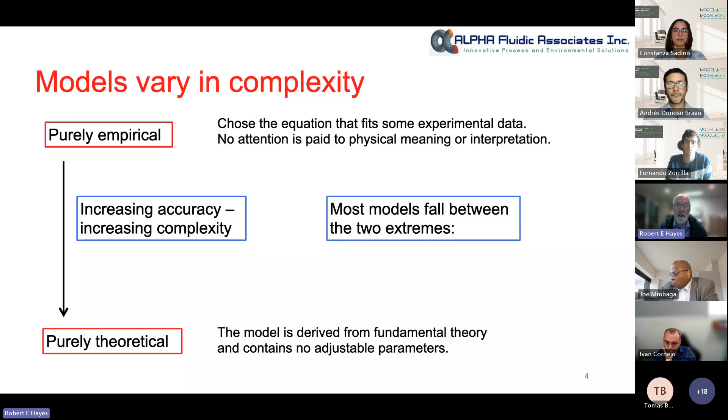Be very sure what the model is going to be used for, because that determines to a certain extent the model you choose. We can make incredibly complicated models for very simple processes, but there's not really any point. Don't make the model more complicated than necessary. Remember, the model doesn't have to be perfect to be useful.

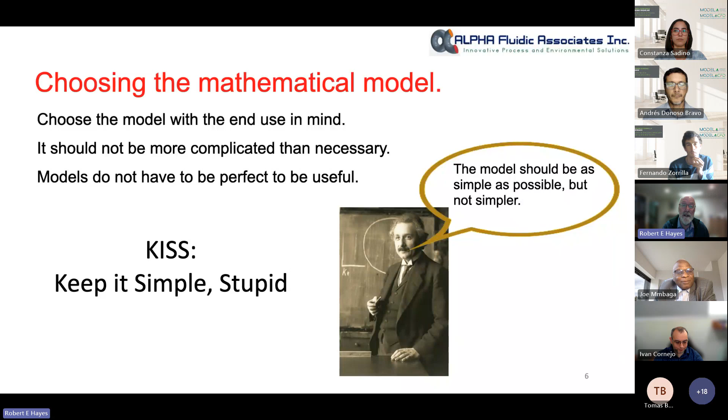The quote in the speech bubble is usually attributed to Einstein, although there's no evidence he actually said it. Make the model as simple as possible, but don't oversimplify, because that can lead to errors. I'm not sure if it's politically correct to use the KISS principle, basically keep it simple, don't make things more complicated than they need to be.

There's a whole world of mathematical modeling, and what we're really focusing on in today's webinar is what we call chemical process models. Essentially, in a chemical process model you're solving the basic momentum, energy, and mass balances. You do that in any process, but here we're really talking about transport phenomena, where all the equations take the form of complicated partial differential equations.

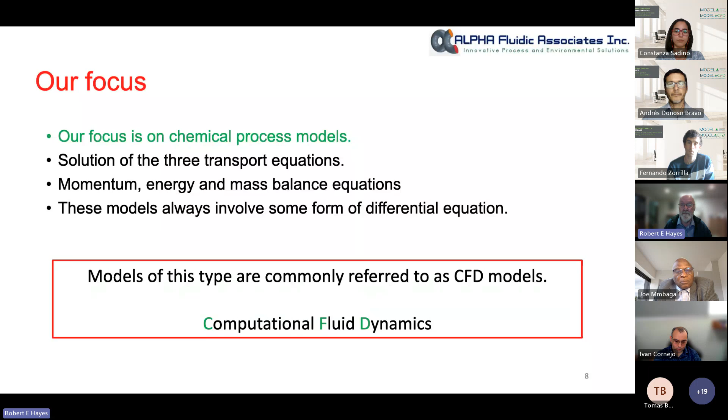When modeling that type of system, it's generally referred to as CFD, computational fluid dynamics. That's a bit of a misnomer, because nowadays modern CFD modeling includes temperature and transport, so it really should be called computational transport phenomena. But the first codes people dealt with were solving the Navier-Stokes equations, and that's why it's called computational fluid dynamics.

So that's kind of a crude introduction. Now, what do you do? What are the basic steps in building a CFD model? From a global point of view, it's very simple. First, you're going to have some kind of physical system - here we have a biofermentation reactor - and you're going to decide what equations you're going to use.

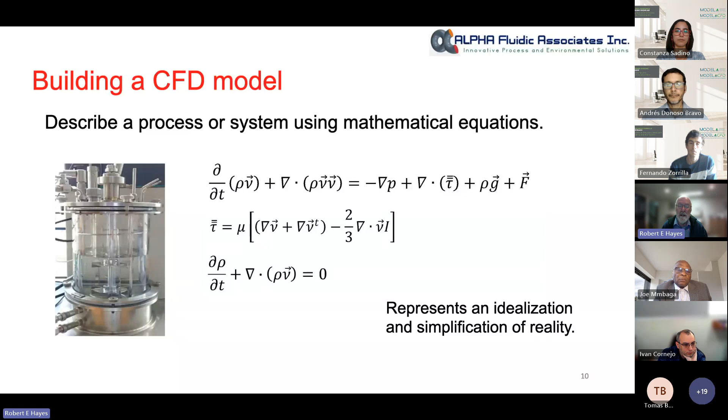You recognize that the equations you choose are always some simplification of reality. You're making assumptions - you're always going to be making simplifying assumptions, and you hope that they are the good ones. Now those equations have to be solved in the computer, so you have to translate everything into a form the computer can understand.

So now what's the next problem? We cannot solve the equations in the CFD model analytically, so we have to use approximate solutions - these solutions have to be numerical. Essentially, what you do is take your big domain and break it up into a bunch of little pieces. You need to do that because you're approximating your partial differential equations with algebraic equations, and they're not accurate over the whole domain.

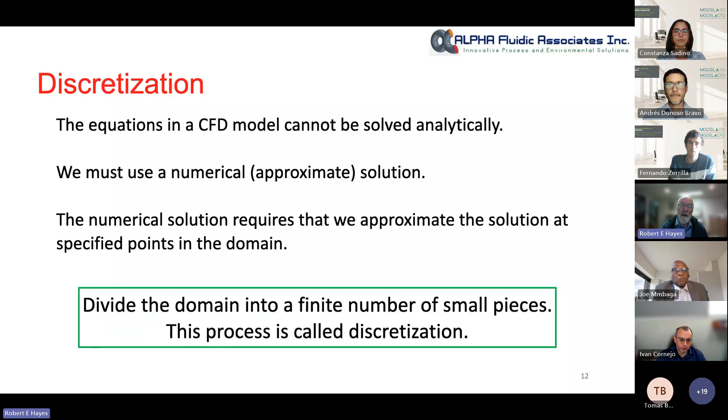Again, we have good software tools that allow us to do that. What's important to appreciate in the whole CFD modeling process is that building this mesh, this discretized domain, is key and perhaps possibly the most important step in obtaining a reliable solution. If you don't have a good mesh, you will not have a good solution.

When you are doing your solution, you have to test very rigorously that the mesh has been built correctly. So at the end of this step, what you're going to have is a whole bunch of equations written over your domain, and then we have to solve those equations.

I'm not going to talk at all about solution methods, but just be aware that there are many different ways of solving equations, and the choice of solver you choose is going to depend on the system you have. Commercial CFD codes have all kinds of options, and it's very important that you choose the correct one.

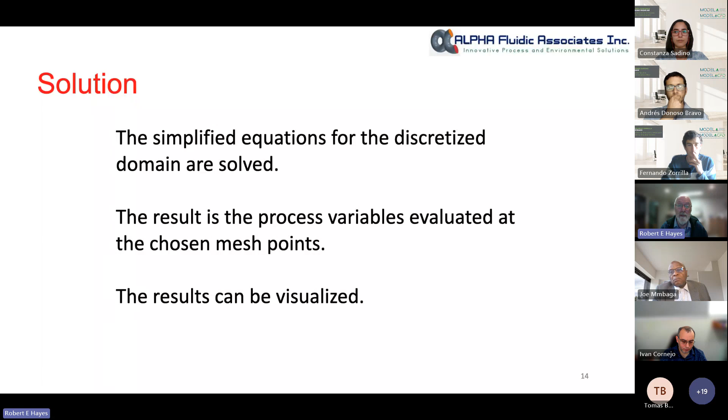If you're doing a complicated 3D modeling study, especially transient, you're going to get terabytes of data, so visualizing them can be quite complicated. I'm not going to talk about the exact techniques, but there's good software to do that.

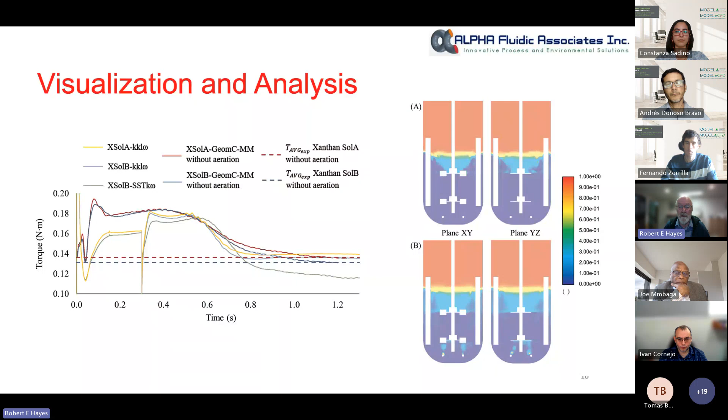But also you might have simple graphs to track certain variables at certain locations in the domain. The point is you can make lots of very flashy, pretty pictures, but coming back to it, you have to make sure that those results actually make sense.

That's going to give you some error. Then you're going to solve it and get your solution at your given points, and then there's going to be numerical error. What's important to appreciate is that all of these steps in the solution are going to give you some error. You can't get away from it.

Of course, the third one is where you just screw up when you're inputting the data, and that can be hard to find. And then finally, the numerical errors, which come from the solver. Again, there are tested methodologies for looking at those errors, but it's super important that you examine the errors in your system.

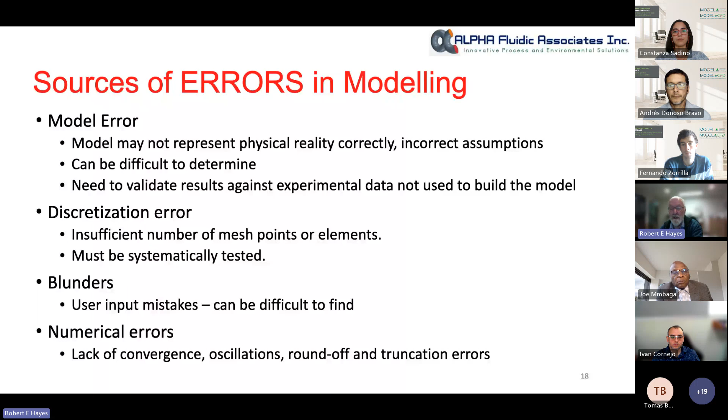And that really brings us to the final topic: validation. What do I mean by validation? Validation is the idea of proving that your model is giving you an acceptable level of accuracy. There are books written on how to validate models, but basically they have to reproduce your experimental data. And if they do that, at least that means the model is reproducing your experimental data.

That's a little bit of a cheeky statement, but that's really all it says. Because unfortunately, no model can ever be completely or perfectly validated and verified, because there's always going to be some experiment that you don't try, that maybe it doesn't fit on. So these are just things to keep in mind.

Now, at the end of the day, when I started, about 40 years ago, I wrote my own finite element codes. Well, nobody does that anymore because it's too complicated and it's also a waste of time. So you're going to use a commercial code.

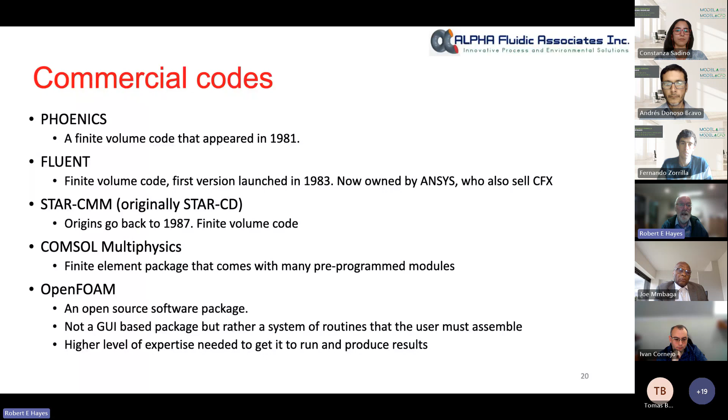The reality is that anybody today who's doing serious CFD modeling is going to use commercial codes or open source codes. You're not going to waste time writing your own.

When used with care by knowledgeable users, CFD codes can be an enormously powerful design tool, and that's very true. If you don't know what you're doing, you can get lots of very nice, pretty pictures, but at the end of the day, they don't mean anything. They might satisfy your management who don't know anything about CFD, but they won't be very useful.

I guess I would say commercial codes are user friendly. The companies make a lot of effort to make them friendly. You can install them on your system or have someone do it, run the tutorials to figure out how to do the input, and you get pretty results. But that doesn't necessarily mean the results are correct.

What I'm trying to get the message across on, I keep beating on it, is that you should be very, very skeptical of CFD results. I'm not saying they're always wrong, but CFD modeling does have to be done correctly.

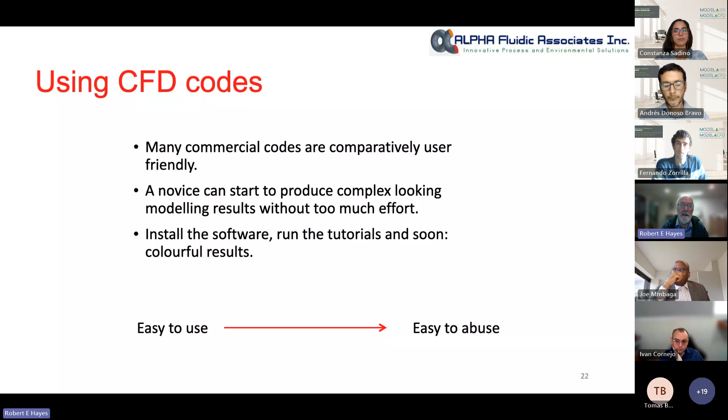And my last words of wisdom, and then I have a short example to show you. Once you've got a really beautiful, verified CFD model, the worst thing you can do is use those models to predict results that are outside of the experimental data range. In other words, don't extrapolate results. It's like predicting the future based on the present.

Go back to an issue of Popular Mechanics, if you know that magazine from the 1950s, and see what they were predicting we were going to be today. Half the population of Earth was going to be living on the moon. So it doesn't work. It's really, really dangerous to extrapolate.

In general, the more theoretically based the model is, the better it's going to work. But even then, extrapolating can be dangerous. So that's the end of the formal bit, and I'm just trying to give you a little bit of an insight into what CFD modeling is about.

And now I'm just going to show you a very short example. I'm not going to give you a lot of technical details. It's just that we're pretty proud of this project.

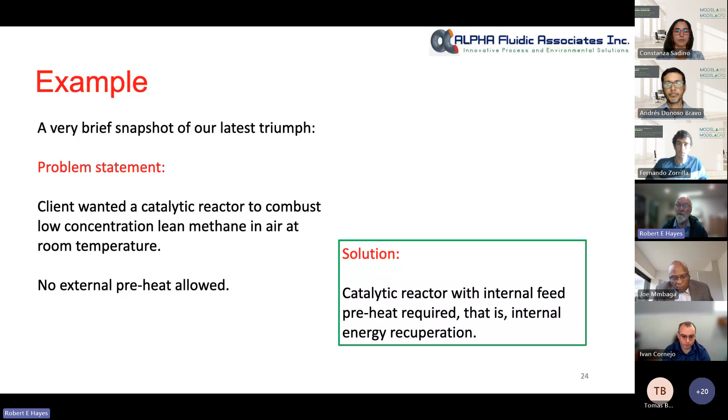This was a system where the client wanted a catalytic reactor to combust low concentration lean methane. So you have like 1% methane in air at room temperature. You're not allowed to preheat the feed, and the reactor has to burn the methane. So basically what we do, we have to design a catalytic reactor with an internal feed preheat, an internal energy recuperation.

That was the idea. So we do some CFD analysis to study the operating range, and without going into all the details, you can see this is a temperature projection, and we were able to demonstrate that provided we could ignite the system, we could maintain temperatures to get methane combustion with room temperature feed.

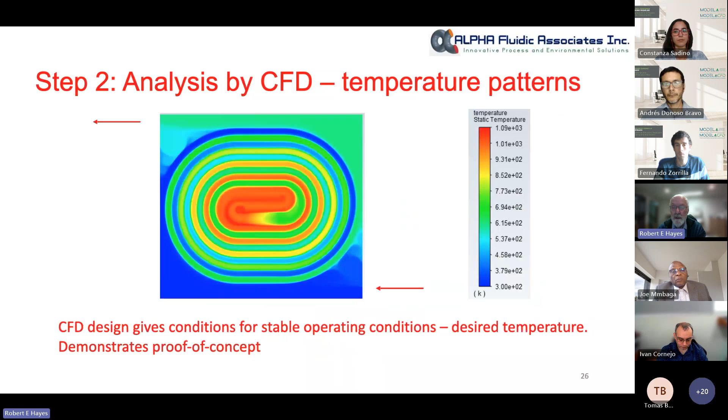So basically we built this, we did a whole bunch of tests, and at the end of the day, without showing you the results, I would say that the model predictions were exactly what we got experimentally, which was amazingly cool, we thought. Perfect CFD design.

So we went directly to scale up to full production size. Of course, we designed that in the computer. We do CFD analysis to make sure we'd get good flow distributions, temperatures, etc., because it was a much bigger unit. And at the end of the day, it worked.

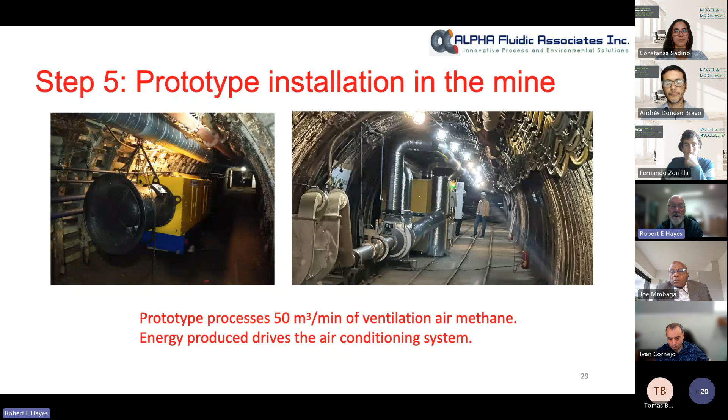So, summary, this was a completely CFD-driven design. We only had built one pilot reactor, and we did direct scale up with just CFD. So this was a huge savings in time and cost. And now what we've been asked to do is optimize and scale up the design by a factor of 10.

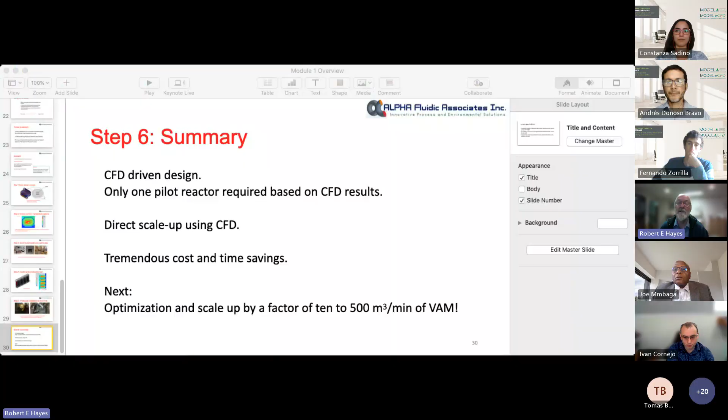Thank you, Robert. Very insightful presentation. A quick overview about what CFD is all about, and then a very interesting real case application.

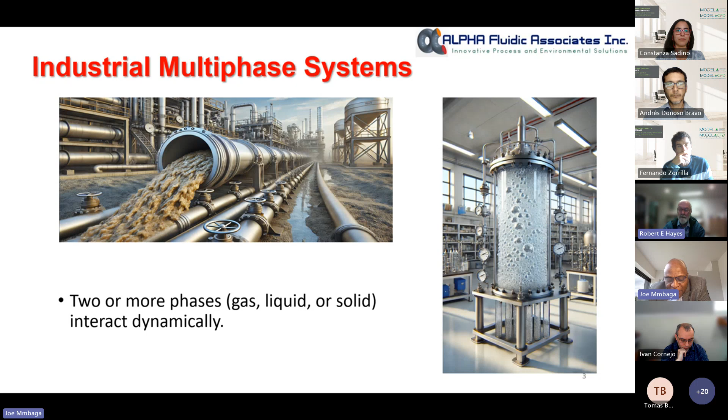So first, the what. A multi-phase system is a system where we have 2 or more phases, being liquid, gas, or solid, and they're all interacting dynamically. This leads to what we could say is either gas-liquid, in case we are talking about bubble columns, or liquid-solid if you are talking about slurry transport, or even gas-solid when you are talking about fluidized reactors.

Now, be all what it may, this is an extension above what you heard from the first presentation, that we are now going to add some more things or more issues which are going to come. In particular, we look at the interfacial momentum transfer, or also we have to look at the distribution of the phases and their holdup, as well as the turbulence, because in the presence of additional things in the system, the turbulence can be affected by the particles. And last but not least, we also have to take account of the interaction between and amongst the particles.

Now, having said that, then we need to have some approach. We can either consider all the phases just to be a continuum, or all the equations which are available are going to be solved for each phase on its own. And therefore they need to be coupled.

And if you use the Eulerian method, then the coupling is mostly just using models. This approach will be more suitable when you've got dense mixtures, but it won't be very accurate for following the particles. But again, since it is just for a simple system, the cost for computation here is not that much.

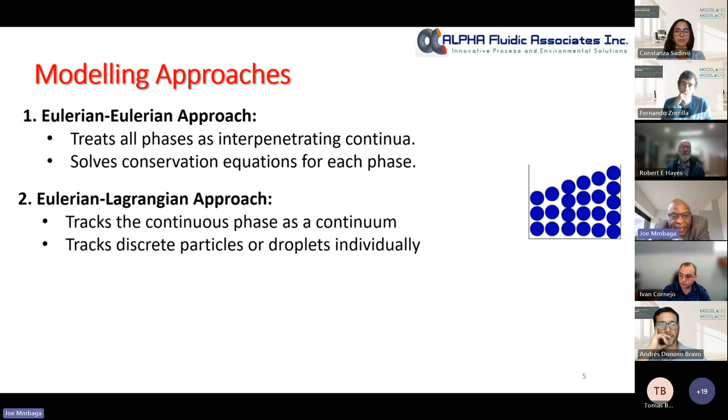Now, the other approach would be to treat each phase separately and then track the particles individually. So this is going to be much more computationally heavy, but then the accuracy is much higher than the first method, the Eulerian method. And also in this case, since we are going to be doing all these calculations for all the particles, we are limited to dilute systems, that being less than 10% in concentration.

Now, coupled to these methods, we also require to track the interface when we have immiscible fluids. In this case, we have methods like the volume of fluid or the level set method. And if we want to follow the distribution of particles, or maybe the growth or coalescence of particles, we have this submodel, which is the population balance model. So the matter of fact is there are only 2 methods, and these 2 can be said to be kind of subsets of the first 2 methods.

They're like the volume of fluid method and the level set would be Eulerian, a subset of that. Whereas if you're talking about DEM or maybe DPM, you'll be following this method here.

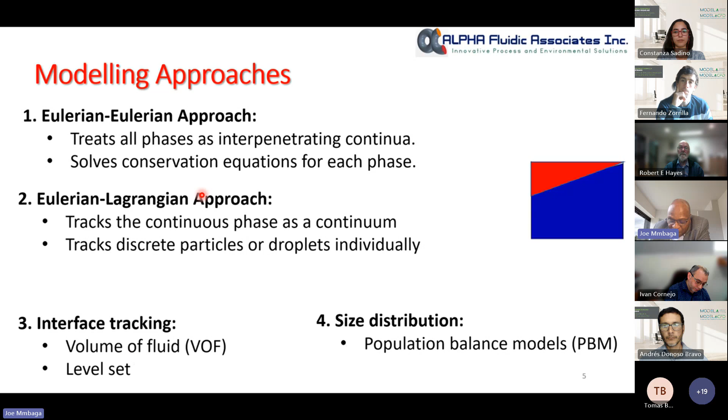What then to do? Why does this matter? It matters because in order to properly understand, design and optimize industrial processes, sometimes we want to find the efficiency. Maybe we are dealing with cyclones, which I'm going to show an example for. Or it may just be a matter of safety—maybe in a pipeline, particles are going to cause erosion, so you need to know the locations where this phenomenon can happen. And last but not least, it has to do with quality. Maybe in a granulation process or a deposition process. In that case, CFD can help us understand this much better.

Now what will be the tools? You already heard about the tools from the first presentation, but here I want to emphasize one additional tool, because those previous tools, ANSYS and COMSOL, are all general purpose. There's this additional tool here, MFIX, which is multi-phase flow with interphase exchange. This is purely dedicated to multi-phase. If anyone is new to multi-phase, this will be the package we recommend, because first of all it is free, but also it is supported by US National Lab, so I'll say it's very accurate. If you're new to multi-phase, this is the starting point.

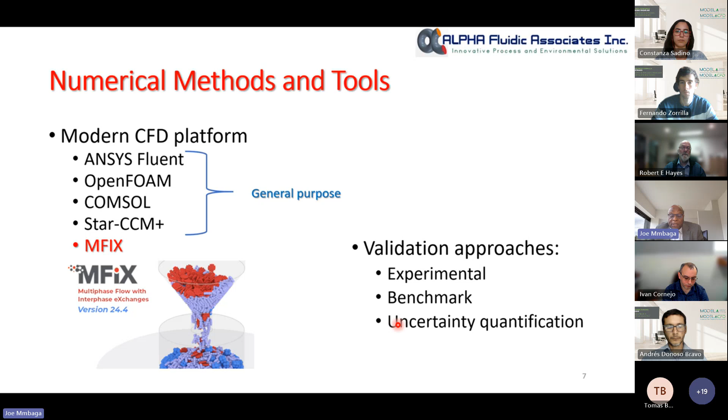Now again, the validation which was spoken about in the first presentation applies here. So for all the work we do, we have to validate, and that's what I'm going to try to show in my examples.

So I have 4 case studies. I will go through them briefly since most of these are client information, so I won't talk too much about some of the sizes and dimensions. However, the last example here I'll be more open about, and I'll show more of what was done exactly. In the first example, a client—an international client—wanted to venture into Alberta oil sands, and they needed to understand the challenges they would face when you have a very large area where you can get your bitumen, but you want to process it at one place.

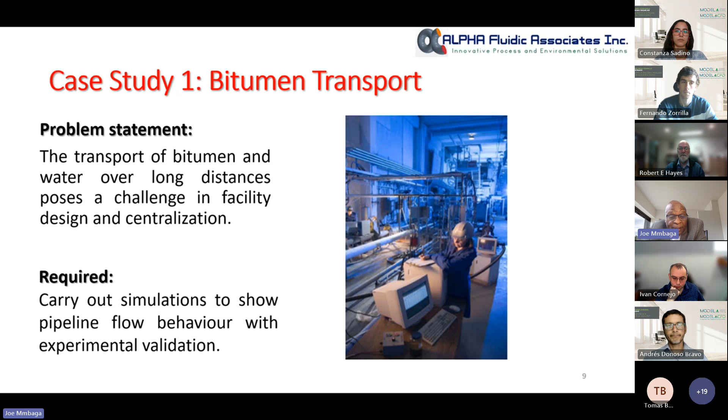So the task was to figure out and understand the flow behavior of this bitumen as you transport it along a long distance. This required 2 parts: first, an experimental part to see how the flow works. This was subcontracted to another lab, and we were contracted to do the CFD part based on the lab results.

Now the next part was to look at one of the phenomena whereby the mixture here is bitumen, which is a heavy oil, and it's difficult to transport this unless one can modify at least the wall interactions. So we want to see if we can reproduce what we call core annular flow.

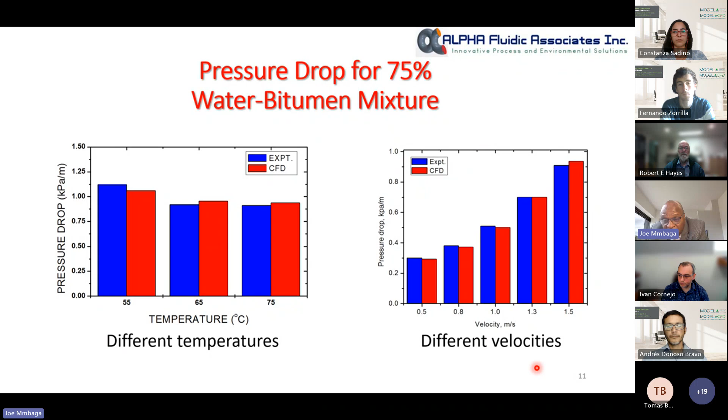For this part, again this is still a validation whereby we are looking at varying temperature based on experiments and CFD, which we could match very well, as well as varying velocity—again the CFD was matching very well with what was shown experimentally.

But with establishing the right flow conditions, the bitumen will migrate to the center of this pipe, leaving a very thin layer at the sides of the pipe. Therefore, the pressure drop is very much close to what one will see in a fluid like water flowing around. So this was a success, and the client was able to proceed.

I don't know if this project was actually built, but at least there was a flow assurance that yes, you can use CFD to elucidate what will happen when a complicated mixture of bitumen and water under different conditions can work under these parts.

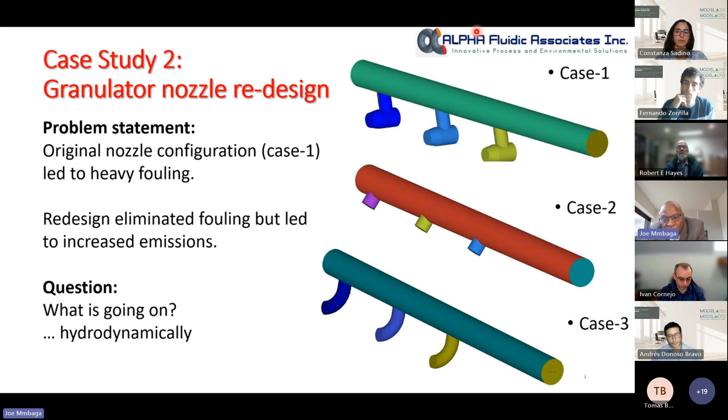So what we did was carry out multi-phase simulations for all three geometries. Now what you are seeing here is the model we made of the client's geometry, and then we carried out simulations for each of them.

Now what if we did the same flow but with the second case? In this case, the second case was a straight nozzle, and yes, they were able to eliminate the fouling problem. But as I said, still now they experienced higher emissions.

Now with the third case, again they increased the length of the nozzle and also it was kind of bent. Yes, there were no dead zones, and that's why the fouling was eliminated, but still the emissions were not eliminated.

In other words, the original problem, which was more of a reliability problem because they had to change the system more than they had planned, has now turned into an environmental problem. It was now more of a regulation issue because they were not meeting the standards.

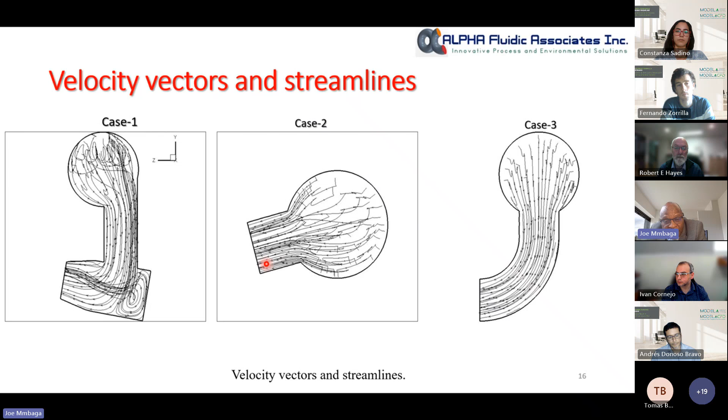In evaluating this situation, what we found is that there must be something at the local scale. Therefore, we had to compare the turbulence intensity as well as the energy dissipation rate. What we see is that for the original case, which I'm calling case 1, the turbulence intensity is much higher than the rest of the two cases.

Whereas in the case when they shortened this nozzle, it's almost 5 times less. And when they increased the length a bit and also made it a bit of a bend, it was increased maybe, but it's still 3 times less.

So with this understanding, remember this client was a sophisticated client. They knew they had a problem and they had a solution. It's just that they didn't understand what was the cause of the problem.

From the CFD calculations, it was clear that they had to increase the length, or at least make sure that this zone, the nozzle, wasn't just there to spray the slurry, but that some kind of conditioning was happening at the very low scales. With this knowledge, the client was able to solve the problem and continue with their production.

Now, with the next case, this was a different client. In this case, there's a gasification unit, and the issue again was fouling and erosion. Mostly this was in the first unit, a gasifier, which was gasifying asphaltene. Next to the gasifier we have a cooler, because we get a syngas.

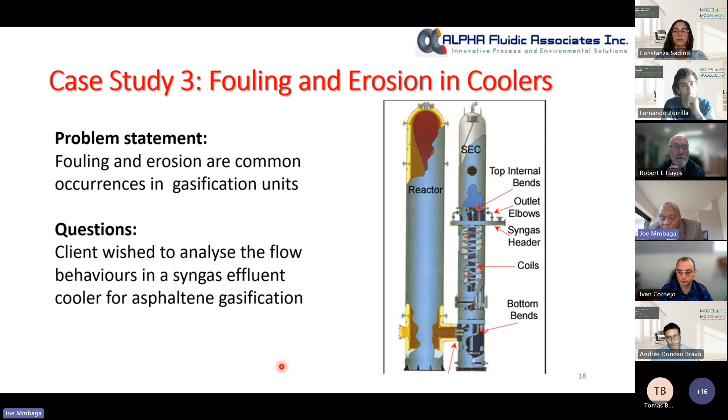From measurements, if you pick one bend, this is what was found - you could even have holes in some of the bends. So carrying out a CFD simulation around this geometry, we're able to show that yes, in these corners, in the bends, that's where you have the highest erosion rate.

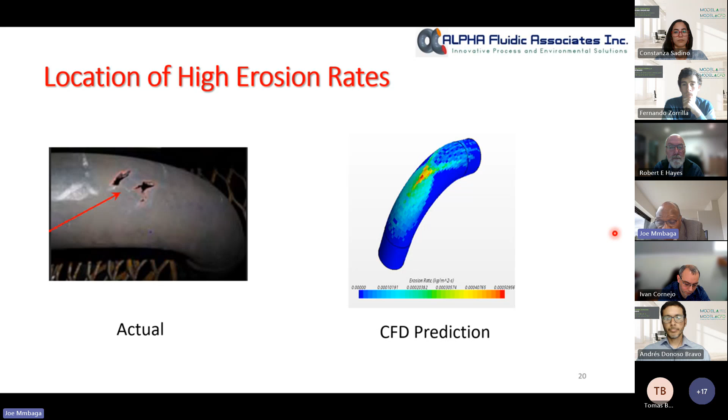So what the client had to do now is revert back to using large radius bends in all their pipes, and the problem was eliminated.

Now my last case, which I hope I have time to talk about, is the hydrocyclone separator. It's not a very big device, but it's very popular in pulp and paper operations, and also in oil sands. The task here was really just to get a basic understanding of how this device works and how to improve the design.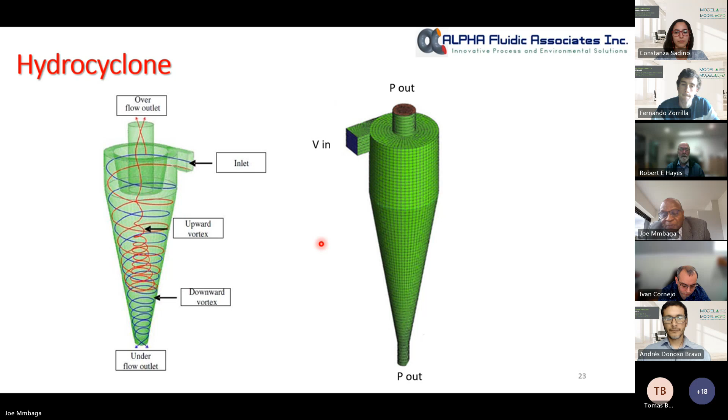I'm just going to describe how this works. The biggest part here was really to come up with the geometry, and how to establish the core - because the key to hydrocyclone separation is to be able to have a very good air core at the center. We can see that it was able to be captured. The elements here were hexahedral, about 500,000, and the whole phenomenon was captured. We're also able to verify the flow split as well as the size of the core.

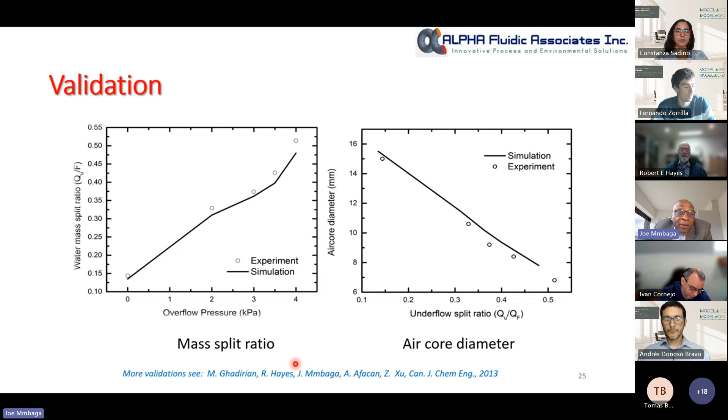Now, with this knowledge, it was possible to continue and do the design. For more information, this is published - it can be found in this paper.

What are the challenges? There are, of course, challenges - computational costs can be high due to the complex calculations. Likewise, the accuracy of the models depends on how one can select them, and of course they all require validation. Future trends - the way you see it, machine learning is going to be integrated into this, as well as having more high-performance computers and advanced models.

To conclude, multi-phase flow modeling provides critical insight into complex phenomena, and their applications are quite wide, as shown. The call for you is to explore these tools if you want to succeed in this field. And Alpha and Modela would like to be your partner in CFD. Thank you.

Thank you for the nice presentation. It's nice to see new tools like the one you just showed that people working on CFD can also tap into, apart from the traditional software. And the case of corrosion is very impressive, that you guys were able to predict the exact position where the corrosion was going to take place. Very impressive. Thank you.

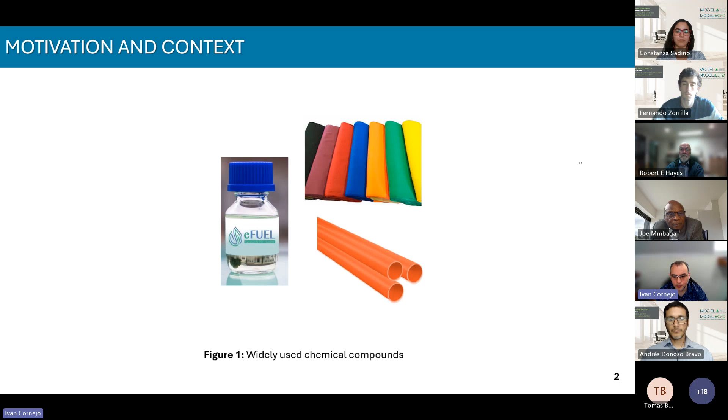It is currently accepted in the community that we have to reduce our dependence on fossil fuels. We're not talking only about fuel for cars, but also for many materials we use every day, like fibers and plastics. All of them currently come from fossil fuels, but it is also possible to make fuel, textiles, and plastic pipes from green hydrogen and captured CO2 from the atmosphere. In that way, we can produce identical chemical species but with reduced carbon footprint.

Of course, there are many challenges related to this. Today, fossil fuels are cheap and inexpensive - we basically dig in the ground and the oil comes up. But when we use hydrogen and CO2, we have to combine the molecules and build bigger molecules using temperature, pressure, and catalyst.

One important species in all of this is methanol. Methanol can be synthesized from hydrogen and CO2 and can be used to produce many alternative fuels, for example DME, but also some identical to natural ones such as gasoline, synthetic LPG, and so on, and also materials like polyethylene and polypropylene.

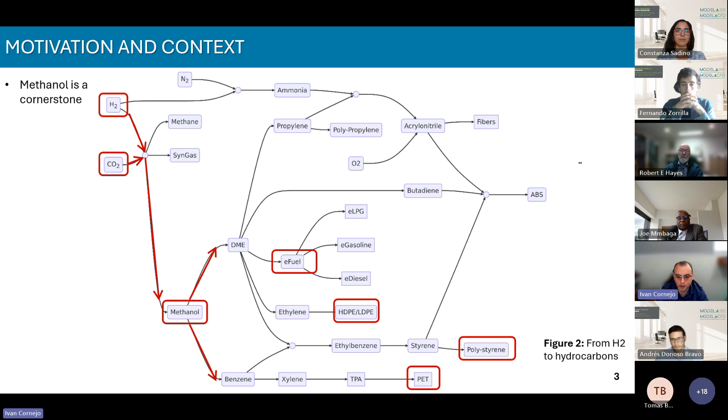How is methanol made in chemical reactors? Basically we mix CO2 and hydrogen in a reactor - I'm not going to go into the details because it's too boring. But with temperature and pressure, mixing these molecules in the presence of a catalyst, we can form new molecules, in this case methanol. Despite the temperature and pressure we use, we still don't have high yields or performance, so we have to separate the reactants that did not react inside the reactor, compress them again, and pass them through the reactor again.

That forces the reactor to be bigger and also requires a lot of separation. In this process, the equipment is expensive, but the separation process is also quite expensive, as is recompression. So if I can have better performance in the reactor, and have to recirculate and recompress less, or the pressure drop inside the reactor is lower, then I have savings and can reduce the cost of producing these derivatives such as methanol.

Everything here is happening inside the reactor. Those reactors in industry are quite big. Here I have some examples from a liquid-to-gas, gas-to-liquid plant in Qatar. Here we see the picture - the plant has 12 of those reactors. Every reactor has many tens of thousands of tubes, more than 10 meters long each. So quite big.

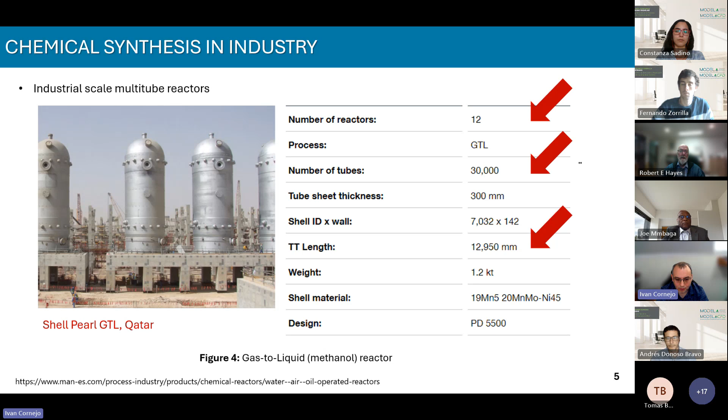Inside those reactors, typically we have many tubes. Inside every tube, we have the catalyst where the chemical reactions occur. In the example here, we have monolith - the most common catalyst support currently is pellet, but here we have monolith. In every tube, we have many monoliths. Inside every monolith, we have many channels, and on the inner walls of the channels, we have the catalyst. So modeling what is happening inside every pore of every channel of every monolith of every tube is quite challenging.

Every time we want to try a new operating condition or new reactor design, it is not possible to physically build the entire equipment, or at least it's not cost efficient. So, as the other speakers said, computational models are quite useful for fast prototyping and trying different conditions, saving time and materials. Inside the tubes we can have monoliths, but also pellets, which is the most common option, and some foams, for example. There are many scales involved, because the reactors are quite big, many meters long, but the chemical reactions occur at a very small scale.

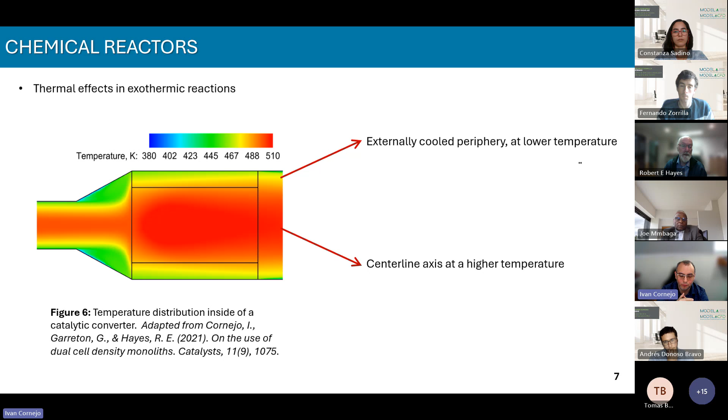So we thought, what happens if we change the substrate to distribute the flow differently, to have more heat released in the periphery and less in the axis of the reactor, so we can have a more flat temperature profile. We proposed a substrate with different configurations in the center and in the periphery.

When we tried to estimate the performance of such a reactor, we found there were no models able to predict how the flow distributes in such substrates. So we were looking for a model able to predict how much flow passes through the center region versus the periphery region, without doing experiments.

So we used CFD models. First, we made a computational model, as we see here in the figure, with two different channel sizes in the center and periphery of the monolith, changing the ratio between channel sizes, which affects how much flow goes through each part. The size of the core was also a variable of interest, to find out how much flow we want through the periphery.

We did a parametric study trying different core sizes, the percentage of the substrate with bigger channels in this example, and also fixing the core size while changing the ratio between channel sizes in each region. We found the effect of these variables on the core velocity in this case.

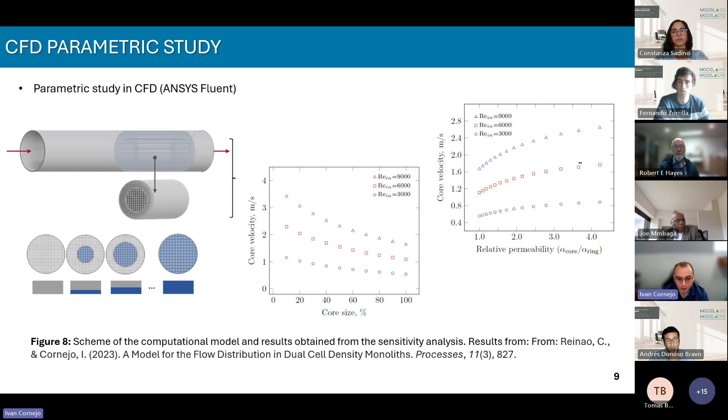Then, doing some mathematical modeling and mass balance, I'm not going to go into the details, but we found a model able to predict how the flow distributes depending on the analyzed variables. After non-dimensionalization, we found that the theoretical model agrees quite well with the CFD predictions. The theoretical model was new, so it needed to be experimentally validated, similar to the CFD model.

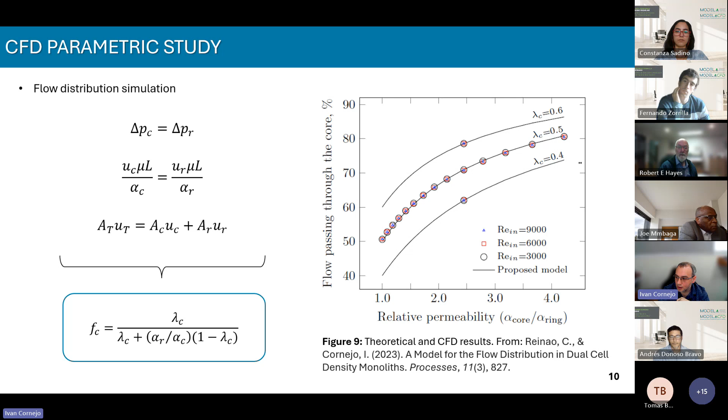After a vast parametric study, we selected the more promising configurations, ones where the flow is more different between cases, and built an experimental rig.

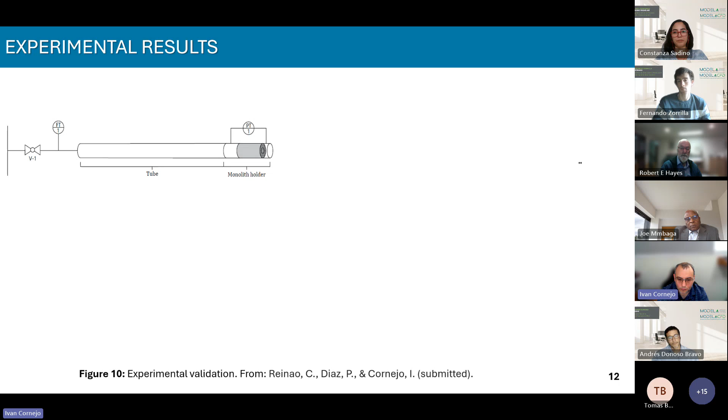Then we did some experimental runs. According to the results, the CFD model agrees quite well with the experiments. Of course we did everything that Bob and Joe mentioned about grid study and all kinds of validations, but this was the strong test comparing CFD results with experiments and with our theoretical proposed model.

In this case, everything came out quite good, finding that at the end of the day we could have validated the theoretical model using only CFD, because the CFD model resulted quite reliable. But of course we wanted more proof that the model was correct, so we did the experiment.

This is interesting because in some cases computational power is now cheaper, and models are becoming more sophisticated. So if we follow a rigorous procedure and take care at every step when building a computational model, we can get quite reliable data from the computational models themselves.

So this is an example of how we had a kind of crazy idea, then built a simulation, built a computational model, did the simulation, selected some very specific cases to build physical prototypes, and the next step is trying this in hot flow with chemical reactions, which is of course much more expensive, but we will try only one substrate configuration.

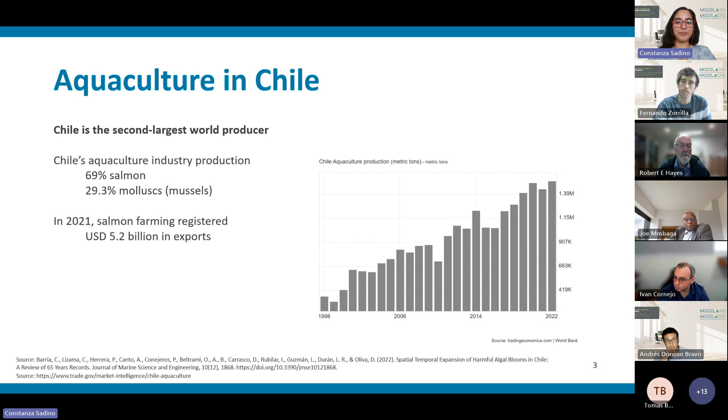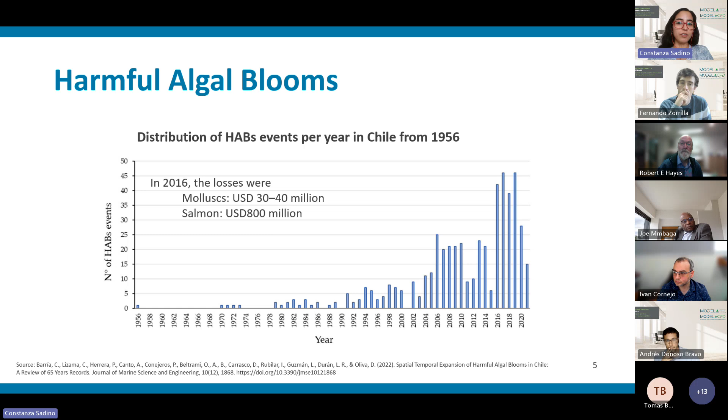To minimize and mitigate the effects of algal blooms, fish farms use different systems based on air diffusers. Upwelling systems are located underneath the fish cages: air bubbles bring water free of algae from deep layers of the water body to the upper levels to dilute the algae and increase oxygen availability. The second systems are bubble curtains surrounding the fish cages to create a physical barrier to keep algae away. The design and operation of these systems is key, but testing the system offshore is expensive and difficult, and testing them in swimming pools could be less effective in replicating the water body conditions.

This is where CFD modeling can be of great help. I'm going to show you the virtual prototypes we implemented for the company Camanchaca, which has fish farms in the south of Chile.

To accurately predict the performance of air diffusers, we need to use a multi-phase CFD model. We need to include key elements such as the perforation size and distribution, because that affects bubble formation; fluid properties such as density, viscosity, temperature, and salinity, because that affects bubble transport and oxygen mass transfer; and also the marine current profile, because we find different magnitudes and directions of the marine current as a function of water depth, which changes the bubbles' movement as well. So we need all those variables in the model.

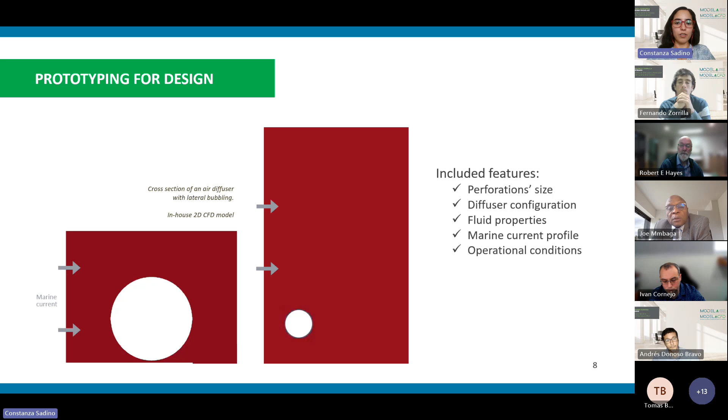perforation size and distributions. So with the simulation, we were able to identify which system lifts more water per cubic meter of injected air. This information is very important for the company, because based on that, they can select the best upwelling system for the specific farming site.

Based on a technical aspect, they need as much fresh water as possible, but also from an economical point of view, because air injection is energy consuming, so that costs money. So with this information, they can evaluate the trade-off between these variables.

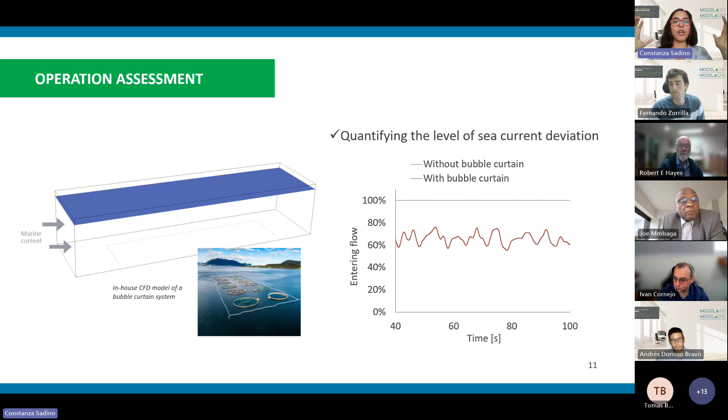In another project, the company wanted to know how effective a bubble curtain would be. So we implemented a model where we could measure the flow entering the farming site in order to know how much water with algae could be diverted from it. We were able to measure that of the 100% of water that could enter the site without the bubble curtain, only 60 to 70% could enter the site using the system. That allows us to have an idea of the efficiency of the protection of the system.

We can also use these models to understand the algal bloom movement and how much dilution we can achieve with these upwelling systems. We can model the algae bloom as a tracer dragged by the sea current, and we can consider the depth of that algal bloom, as well as the depth of the system. We can measure how much algae is penetrating the system with the bubble column operating in the site, and we can see that there is a significant reduction of the algae present.

All these simulations that can give us very important information to take decisions have a significant computational cost, so we can understand the complexity of the model, as Dr. Hayes explained in the first presentation. In this case, we have huge length scale differences. We have the water body that can have a domain with an extension of 100 meters, and we have the micro perforations of a few millimeters.

So it requires a demanding mesh refinement to be able to capture the bubble movement. You can see here on the image on the right that these blue colors are actually very small cells that are trying to capture the movement of the bubbles. Also, we have to capture very well the velocity gradients in the injection zone and also the interface between water and air at the surface.

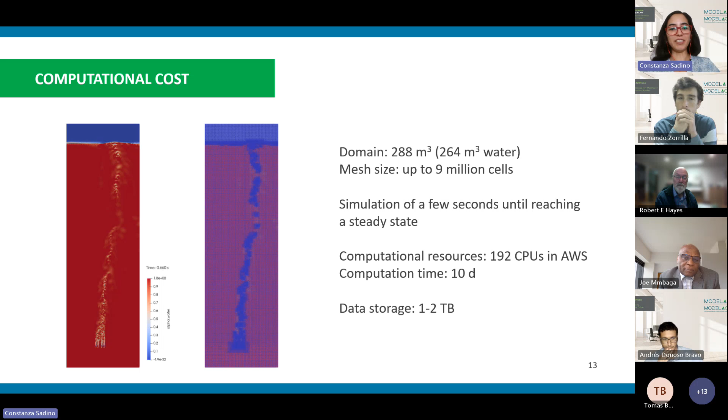Therefore, these simulations require using 192 CPUs to simulate a few seconds of aeration until achieving a pseudo-steady state, and that could take around 10 or more days of execution of the simulation. Also, it creates terabytes of data that is used to quantify later on the relevant indicators and also to generate these videos that you are seeing in this presentation.

So that's about aquaculture. Now let's talk about desalination. Desalination is the removal of salts from seawater, making it suitable for human consumption, irrigation, and industrial uses. Today, this process is key for addressing global water scarcity issues.

As water scarcity increases, the desalination industry has grown globally, and Chile is no exception. Currently, Chile has 24 desalination plants, most of them located in the northern regions, producing more than 8,000 liters per second of fresh water. It is expected to double its production capacity by 2030 to supply the demand of the mining industry and also of the population.

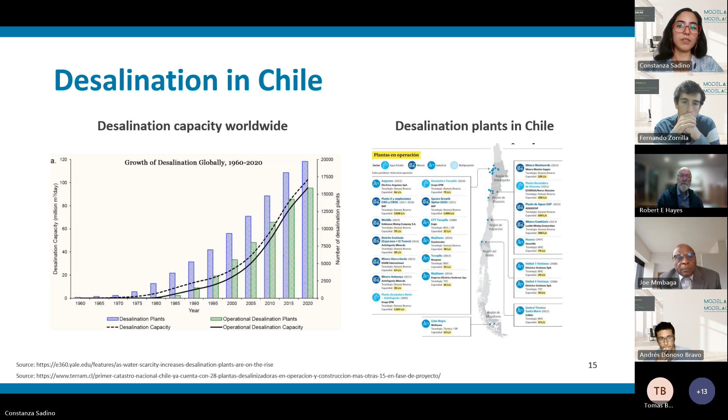Together with the fresh water, the desalination process also produces brine, which is concentrated saline water that is released into water bodies such as the ocean. As the desalination industry grows, the brine discharge has also increased, raising concerns about the environmental impact the brine could have on the sea.

The brine has two times more salt than seawater. So if it is not properly mixed with the seawater, the aquatic organisms are exposed to higher salt concentrations that could modify the ecosystem. To achieve a better mixing, the brine discharge has to be controlled by spreading the discharge and discharging with an outfall pipe farther offshore where the marine currents are stronger.

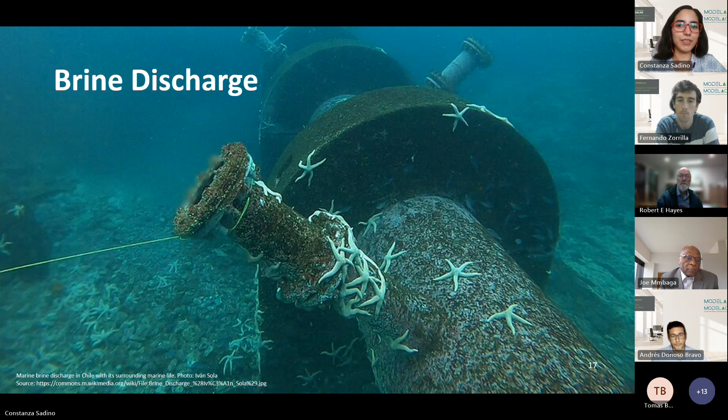This is an example of an outfall pipe that is located in the north of Chile. Again, CFD modeling can be of great help to optimize the design and operation of the brine discharge systems, in order to have an efficient dilution of the brine with the seawater.

So now we are going to review the scope of the virtual prototypes that Modela implemented for the company Candelaria that has a desalination plant in the north of Chile.

To have an accurate simulation of the brine discharge, we need to capture the effect of key elements that affect the brine plume dispersion. We need the bathymetry, because the brine is discharged close to the sea bottom where surface irregularities play a role. We need to include fluid properties, because water temperature and salinity affect water density, and density gradients are responsible for the buoyancy of the plume. It's also very important to have the marine current profile, because the plume will be transported by this current.

With all these variables in a CFD model, we can predict the plume behavior to estimate the impact the brine discharge has on water quality around the outfall, and also the potential environmental impact due to high salinity. In this video, the plume is being transported by the current to the right of the screen, and we can see different colors representing different salinity, the salt concentration. The red colors show a higher concentration of salt.

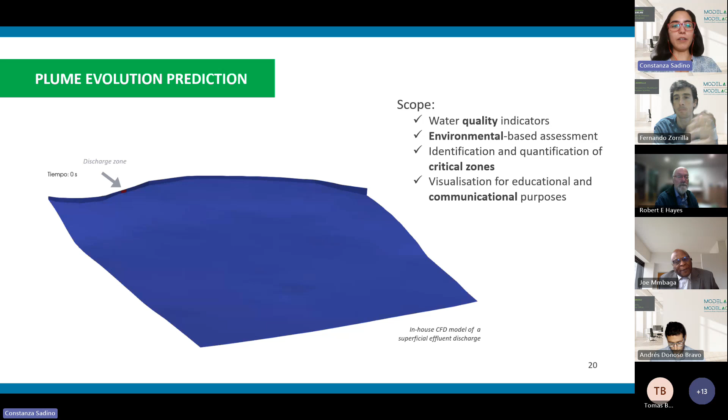Also, CFD models have the capability to capture the outfall configuration, the diffuser's geometry, and the operating conditions, which allows us to accurately analyze mixing factors such as marine current deviation, turbulence, and molecular diffusion. Here you see how the diffusers are affecting the marine current—they are being deviated and also recirculated around the diffusers.

Virtual prototypes help us collect information that otherwise would be difficult or too expensive to measure experimentally, or sometimes impossible. More importantly, they help us test hypotheses regarding the optimal operating conditions, and sometimes they help us confirm if our intuition is right or not.

Let's analyze this case. Our intuition may say that a smaller flow of brine will produce less environmental damage than a bigger flow. However, that is not necessarily true. When the flow is too small to create turbulence around the discharging point, the mixing will be poorer, and therefore the zone with high salinity will extend farther, potentially generating greater damage to sea life. That was what we were able to see with these simulations.

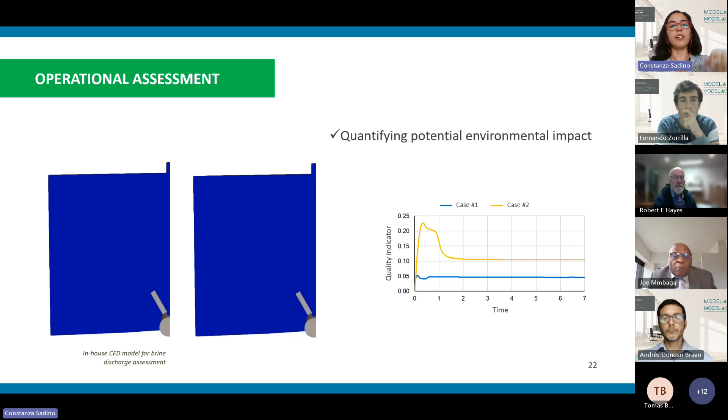In the case on the right-hand side of the video, that one has a smaller flow, but you can see the yellow zones are bigger and more extended than in the video on the left side. That is because of the absence of turbulence.

Just to finish the presentation, I would like to share a takeaway message. Currently, a more sustainable and environmentally friendly industry is needed with urgency, and virtual prototypes could help us achieve that goal. It's a good tool that we should use. Thank you.

Thank you, Constanza, for the presentation with two real large-scale applications. I have a question about boundary conditions for the Q&A section, number 2, regarding the difference between this and the other cases the other speakers have shown.

This last talk of today's webinar is going to be about CFD modeling of moving parts, and we will be reviewing a case study on mechanical mixing.

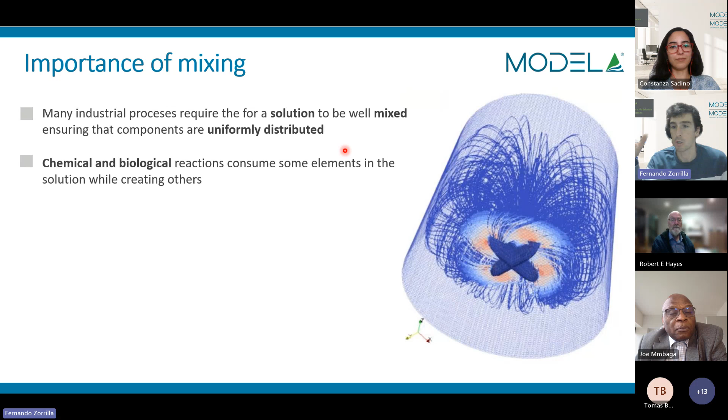Let's introduce the topic of mixing in industrial processes. This can be of huge importance in some processes when we have a solution that is required to be well mixed. One of the main reasons, in chemical or biological processes, is that usually some elements inside the solution are either consumed or produced, and this can create concentration gradients. The role of mixing here is that the movement of the fluid can reduce these concentration gradients, which can improve reaction rates and improve the overall process.

We can also have cases in which heat is being either created or needed, and mixing can also help with dissipation and redistribution of heat along the solution.

So, we have many different types of mixing in industrial processes, such as in the last talk with Constanza. We saw that the injection of air in the fluid can also generate some mixing, but I'm going to focus on mechanical mixing with solid parts, especially the rotational motion of mixers, such as an impeller.

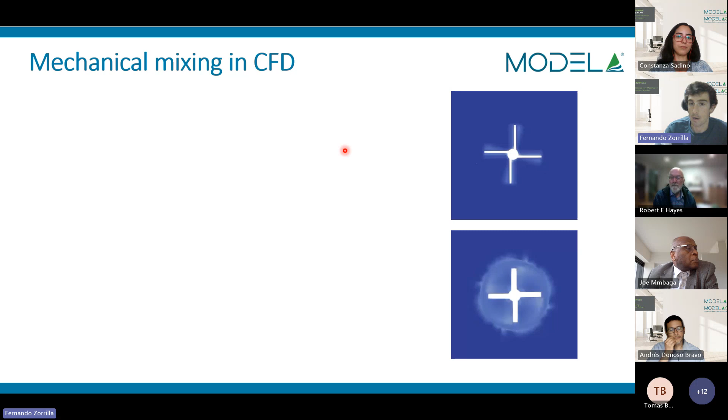There are two main techniques we can have. One is the sliding mesh technique, in which once we have created the mesh we've been talking about in the previous talks, the mesh is going to be updated every time we solve it, so the mesh will be effectively moving. We'll have some parts of the mesh moving with respect to others. This can help simulate this movement, but it will be more computationally expensive. Here in this video on the side, we see the mesh is really moving.

Another technique is the multiple reference frame, in which we use different reference frames. We divide the mesh into two different areas with different reference frames, and they will not be moving one with respect to the other, but around the boundary between these two we can emulate the movement, making it feasible to study steady state simulations with this technique. It will be less computationally expensive, but will also sacrifice a bit of accuracy. Here in the video we see the movement is moving out of the zone, but the mesh is not really moving.

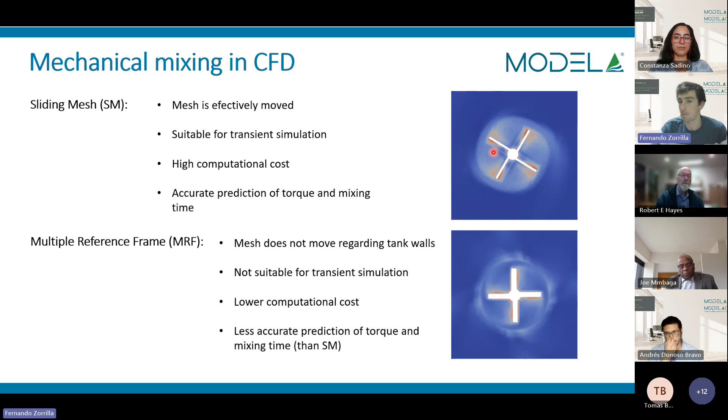So the case study we will be seeing today is about an anaerobic digester. For those not familiar with anaerobic digestion, it's a bioprocess in which we take waste, such as food waste, wastewater, or slurry, put them into a digester, usually a tank, and then produce biogas for energy production, and also this byproduct called digestate that can be used as fertilizer.

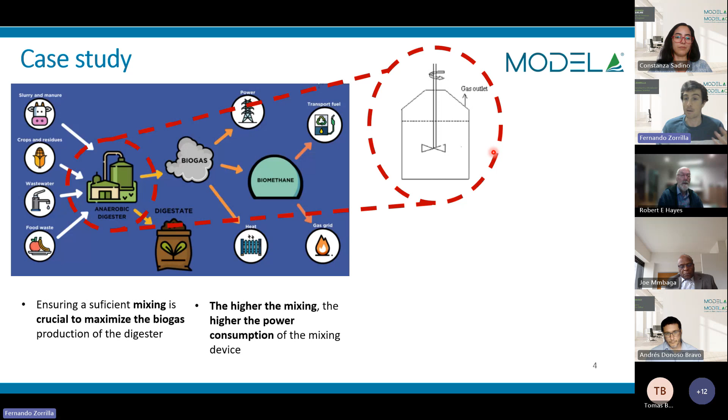So usually in this tank where the anaerobic digestion is taking place, we require a well-mixed solution, and we find that the higher the mixing, usually the better the biogas production we get, but also the higher the mixing, the more energy the mixer will be consuming.

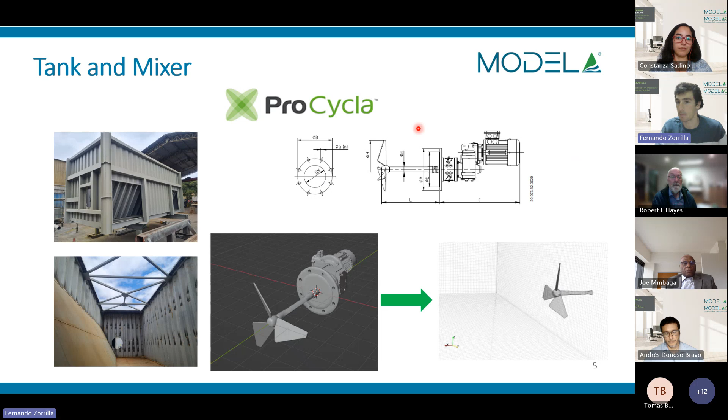This study was done for a company called ProCycla, in which they have designed this digester. They wanted to test if this impeller they had taken was going to be enough for the mixing of the fluid, and also test a bit the operation conditions they could use.

So the system domain - I'm also going to be showing the tools we use, and in this case all of them were open source. We recreate the system geometry with Blender, which is an open source 3D modeling tool. This is a bit of the dimensions of the system, giving us a total volume of around 28 cubic meters.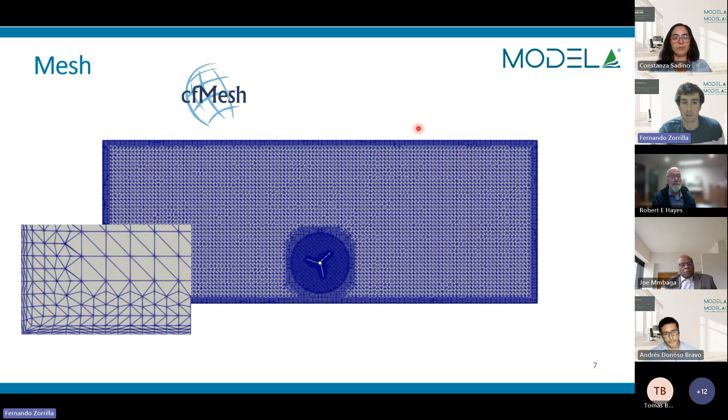Once we have the system geometry, we need to make the mesh we've been talking about in previous talks. For that, in this case, we use an open source tool called cfMesh. Here we have a snapshot of the mesh, and we see it has different refinement levels at different points. The most refined region is close to the impeller, because it's where more resolution is needed. In this case, we have over 1 million elements, which is already quite a heavy mesh.

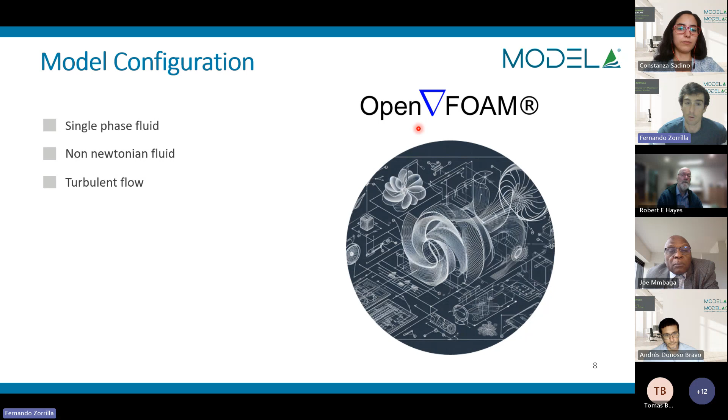For the configuration of the model, we will also be using an open source software that has been talked about before, OpenFOAM. In this case, the model will have some assumptions, as we have also heard before. We are going to take a model that will take only single phase fluid - we will only be simulating the liquid part of the mixing. It will also be non-Newtonian due to the properties of the influent taken into the tank. We'll also have turbulent flow. The simulation will be transient and incompressible, and we'll be using this sliding mesh approach.

Just to give you a hint of the computational cost, it's around 5 hours per second of simulation using 70 CPUs. So, it's not a cheap simulation.

Once we have this simulation running, we have to make sure, as Robert said, many things are controlled so that the results we're getting are feasible. Among many things, one of the most logical things to monitor is the maximum speed of the system. Intuitively, the faster moving part should be the tip of the impeller, and we can calculate the speed of this element. We see in this case it's around 4 meters per second.

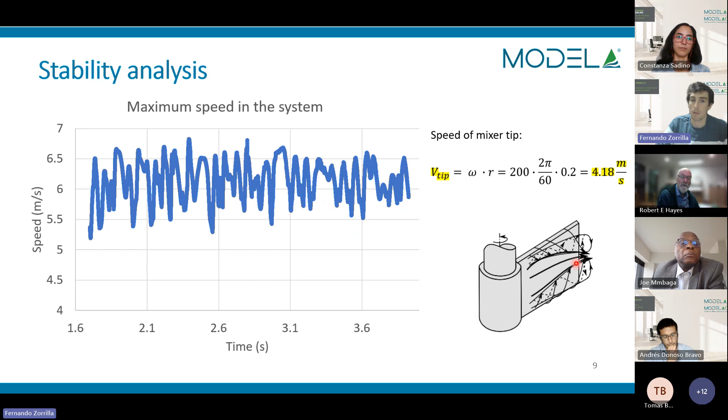So as I said, this is just an easy example, but it's one of the things we have to monitor to make sure the results we are getting make physical sense.

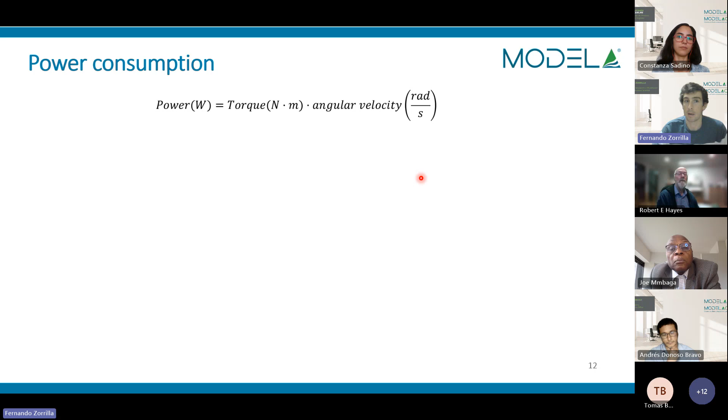Once we have the simulation run for some time, we can also estimate the power consumption, as in the case before that Joe was answering. We run the transient simulation up to a point when we see the flow patterns are not evolving anymore, and we can take this flow field and estimate that it's going to keep constant in time. This is an assumption we make, but something we can work with.

With that, we can estimate the power consumption in the system through the torque. The torque is a magnitude that can be calculated on the surface of the impeller. We can do this with OpenFOAM, among other techniques, to calculate the power consumption. In this case, we were simulating 200 RPMs for the impeller, which gives us a mechanical power consumption of 144 watts - just for the mechanical part, not taking into account any efficiencies of the motor system or the electricity deployment.

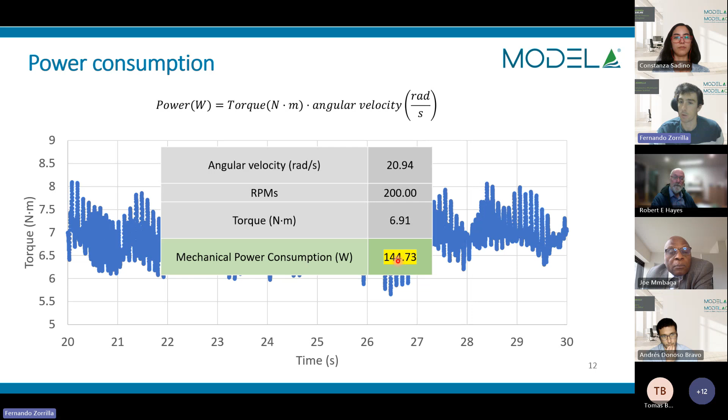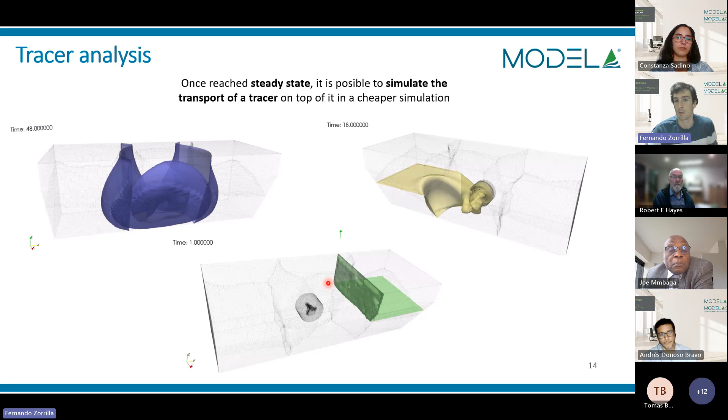One of the things we can do now with this flow field, which we'll consider stationary from now on, is simulate the evolution of different tracer distributions, which can give us a hint of how the fluid is behaving in different regions of the tank. Here we have some simulations showing how this is evolving.

What becomes interesting in this specific problem is that we're interested in seeing how the matter we're going to put into the inlet of the tank is going to evolve. There will be a door where we put all the waste products into the anaerobic digestion, and this has to have a certain location inside the tank.

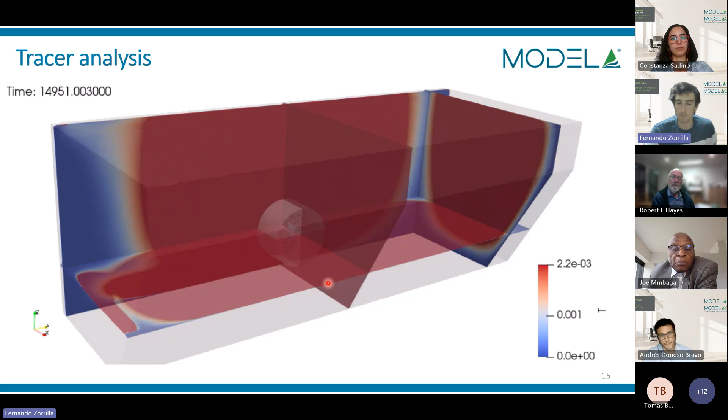Doing this type of simulation, we can actually see how this will evolve, and we can quantify how long it will take to reach a certain level of mixing. Thinking about that, we came up with the idea of actually making a quantity about it.

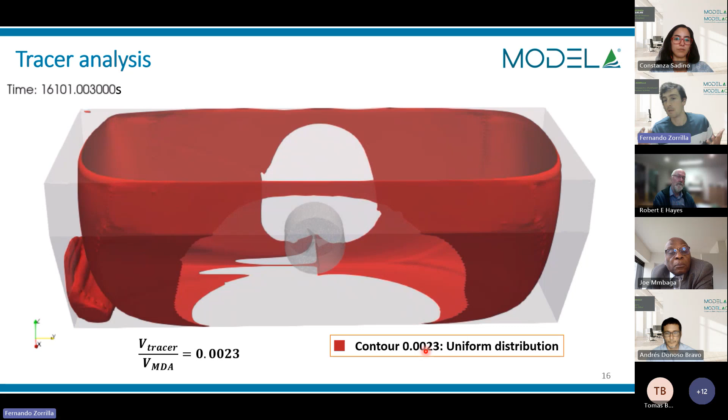If we think about a given volume of tracer and the volume of the total system, we can estimate the concentration in a perfectly mixed tank with this volume. With this we get a given value for this perfectly mixed distribution, and we can evaluate which volume has a concentration higher than or equal to this distribution.

And with that, we see a rising graph, right? Because that means that every part of the volume which has a concentration higher than the one we have established will already be homogenized. The good thing is that this curve only depends on the location of the influent and the operating conditions in our tank, like the rotational speed of the impeller. With that, we can quantify the time it takes to homogenize 80% or 90% of the volume of the tank.

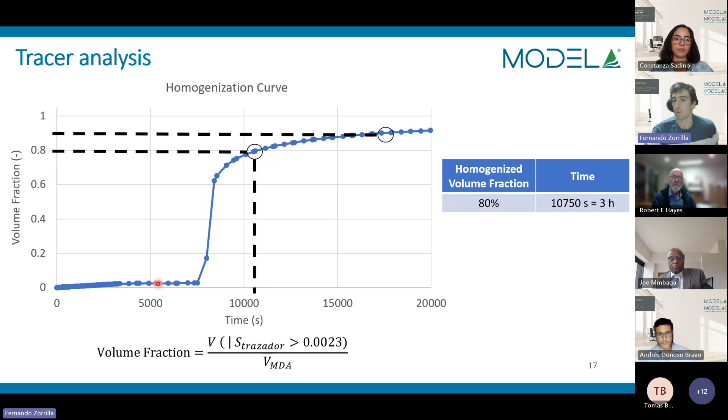Repeating the process for another operating condition, we could also do it for another location of the influent. We can start to compare the different behavior that we find here. In this case, we see the comparison for 280 RPMs against 200 RPMs.

With this, we were able to simulate the different operating conditions that the given impeller this company was going to use. We could compare them and quantify the mixing time for the location of the influent. We can also evaluate the difference in mechanical power consumption, and we see that this also does not scale linearly, as expected.

Okay, so leaving the CFD simulation, now we could make an estimate of the biogas production from this. We could use a compartmentalization method that I'm just going to introduce, because otherwise it will take too much time.

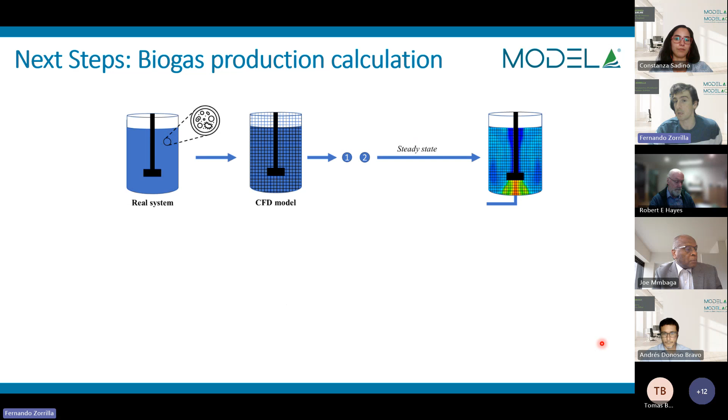So the workflow is as follows. Once we have the real system and our CFD model, we run it up to steady state, iterating through the fluid equations. Once we have this steady state, we can post-process it in a compartmentalization process that gives us a reduced representation of the system.

The problem with simulating biogas production is that this anaerobic digestion process takes several days, and we cannot run the CFD simulation for so long. So we need a way to couple these two processes with different time step requirements. This compartmentalization gives us a reduced representation of the system, but one based on the steady state we have, which will somehow capture the fluid dynamics inside the model.

Once we have this reduced representation of the system, we can solve all the kinetic equations for the anaerobic digestion process, and with that estimate the biogas production and find the optimum we were talking about in the beginning.

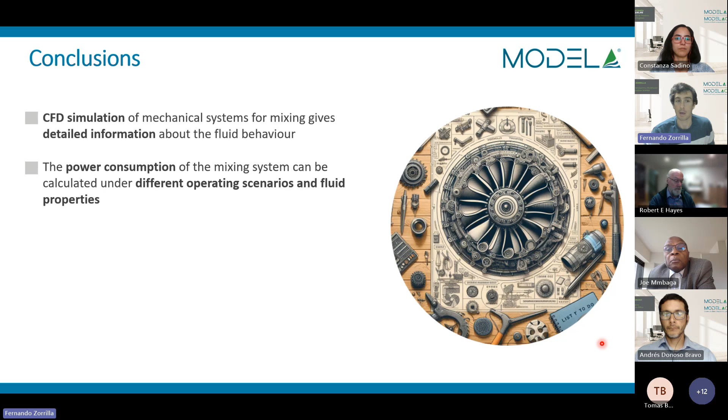So overall, to conclude: CFD simulation, as we have seen, can give us very detailed information about many things we want to evaluate in the fluid. Some of those are like the power consumption that we can test in a simulation such as this. Then, once we have the stationary flow field, we can do other things like transport of tracer distributions, and also use the compartmentalization method to couple it with longer-lasting processes such as anaerobic digestion.

Okay, so that would be it for my talk. So yeah, back to you, Andres.

Thank you, Fernando, and thank you for talking about one of the big challenges in CFD modeling that a lot of people ask about: what about the reaction, the chemical or biological reaction? Can those be integrated into the CFD? There are several techniques, and it's still a work in progress for a lot of research institutions and companies as well. So yeah, that's a big challenge we are trying to overcome.

So just to conclude, a couple of questions from the audience or from the speakers as well. I may start with the first one that I have, about the boundary conditions.

So in the case of, for instance, the system that Joe and Rob were showcasing, like the cyclones, the reactors, those tubes, those are enclosed systems. In your case, you have a chunk of the ocean, basically. So which kind of treatment did you apply for the boundaries? Because the boundaries in this case are kind of fictional. They're not really there.